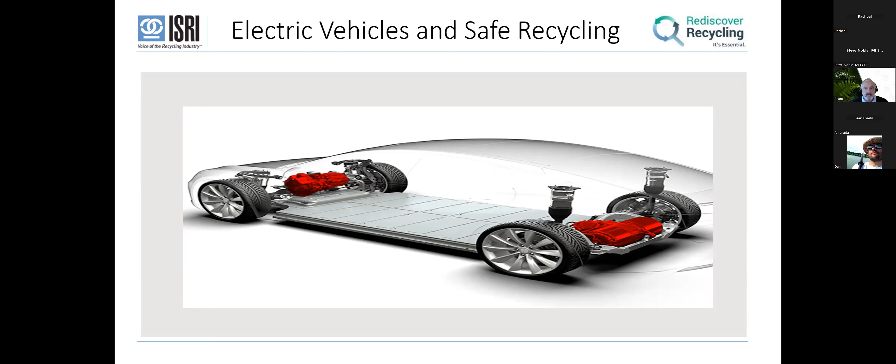And we recognize that so far there has been very little information about these vehicles. And as I said, we continue to learn. We are developing programs working with other parties and looking at many potential hazards associated with these vehicles. Some of those hazards are electrocution hazard, where we're seeing vehicles over 800 volts. We're looking at fire hazards. We're looking at explosion and thermal runaway hazards with these batteries. And we're also looking at the potential for off-gassing, hydrogen fluoride being one of the most potentially serious gases that some of these batteries can give off.

We're also looking at an arc flash potential. For those of you who may not know, arc flash is when something shorts out and you end up with an explosion that's hot enough to melt metal and contains a blast that can injure the person working around these pieces of equipment.

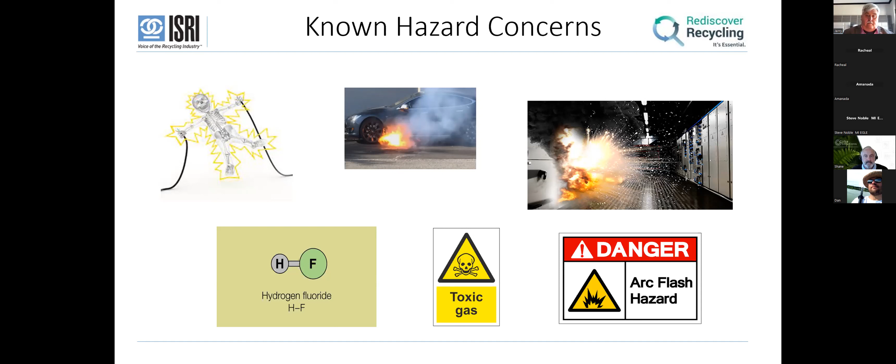One of our biggest threats are compromised vehicles. Having a vehicle coming into our facilities intact is one thing, but having vehicles that have been involved in a crash creates a real serious concern for us. A lot of the issue with compromised vehicles is thermal runaway. Basically it results in cellular failure, which causes the thermal runaway and then results in propagation and can cause some serious fires for us and damage other areas around our facilities. So we have to be very aware of that.

The other part is flooded vehicles. We're seeing a lot of that from the hurricanes in Florida. Those vehicles are compromised and have a potential for shorting out and also causing cell failure and thermal runaway.

One thing we've recognized, and there's a new term that we're hearing about, is concussive battery. Much like the cell failure from having a crash, it could be a minor crash where it looks like there isn't a whole lot of damage to the vehicle. However, much like a human concussion where the brain hits the skull, battery cells can hit each other and may not have apparent damage. But there are cases where because of concussive battery, fires erupt 30 days later or even a month and a half later. And that concerns us a lot. So we're really watching those types of things with these batteries.

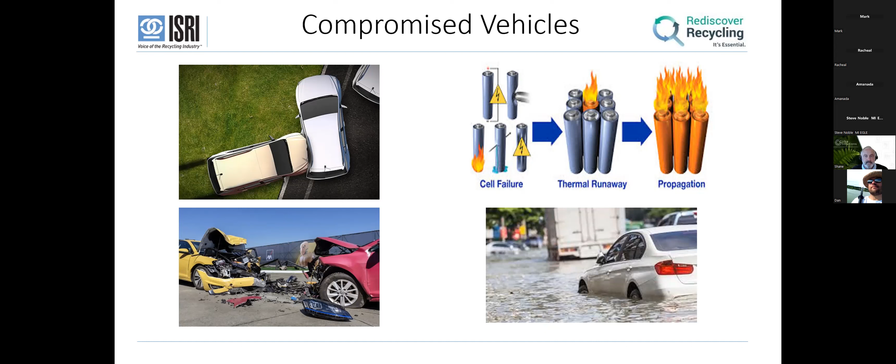So even undamaged vehicles have a potential to be a problem for us. And we need to make sure we're looking at vehicles that are coming to our facilities. They may seem like they can't operate. Anything like an appliance or a vehicle may not have enough charge to function. However, we recognize that some of these batteries still may contain 80% charge to them or more.

Part of the other issue we have is towing or dragging vehicles, because in many cases, these vehicles can actually create a charge that feeds back into the battery. And we need to be very well aware of that as we're going through this.

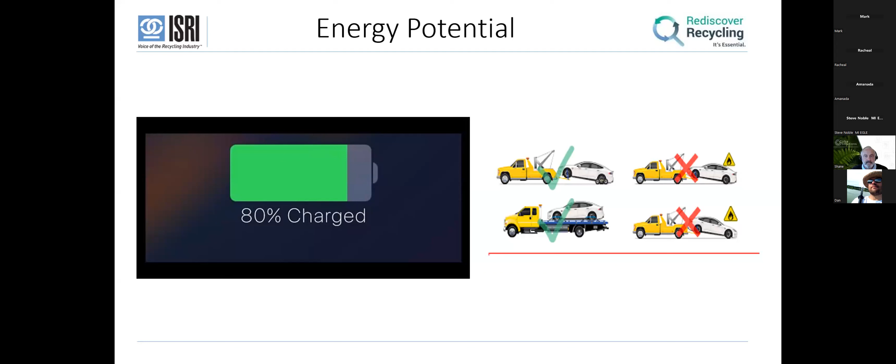So what are we doing? We're developing training programs for our industry. And right now we're at the point where we're looking at 3 levels of training: awareness or inspection level, technician, and advanced trainer. The awareness level, we're actually currently working on curriculum, and we're going to be filming a session that's about an hour long, which is going to be web-based training.

And we're hoping to start filming the end of February, the beginning of March, and we will release that to our members where they will actually be able to sit through and take that program, and they'll get a certificate of completion from that, and we'll know that they went to that.

To move to the technician level, we're putting curriculum together for that. That's actually going to be a hands-on program where you need to pass the awareness level in order to advance to the technician level. And we will be teaching technicians how to safely work around those vehicles. And I'll talk a little bit more about that in a couple of minutes.

The awareness level, I just wanted to point out, we will be teaching people to be able to differentiate between hybrid vehicles, full electric vehicles, and other vehicles, and also differentiate between compromised vehicles and not, and where to actually place those at facilities to keep the compromised vehicles away from everything else in case there is an issue with it, to prevent fires that take off and cause a huge problem for us.

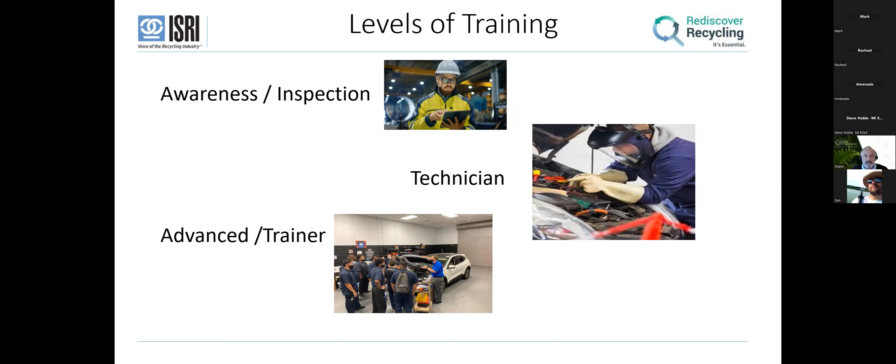Some of the things that we're going to be teaching about the fires and other things around these is what to look for. Certainly, with your different senses, sight, sound, smell, we'll look to see if there's any smoke coming from these vehicles, but we'll also look at things like the smell. We know that when these batteries are about to take off, they oftentimes give off a sweet odor like cherries. And that's one of the things that we will be spending time talking to our people about.

However, we'll be looking at ways to protect people from electrocution by wearing arc gloves and also arc shields and arc flash protective clothing, and also rescue hooks, and having those available on site in case somebody does get into trouble with the electric side of those vehicles.

We're also looking at testing equipment, being able to test if there's any potential within those vehicles, being able to test whether or not there's an issue with compromised cells within those vehicles, and that'll all be part of the training in addition to everything else.

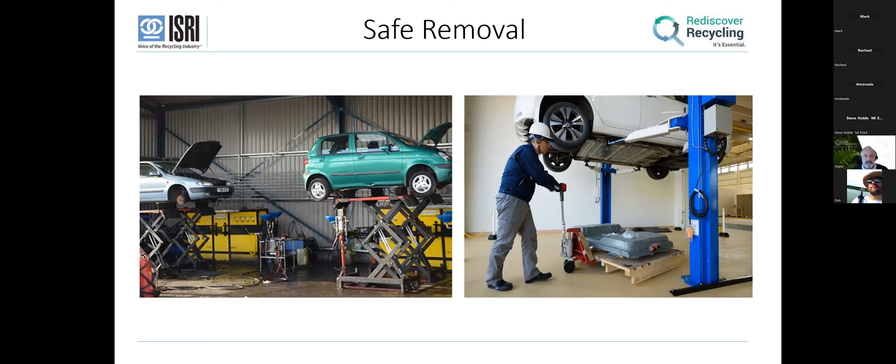Some of the other challenges that we're facing and we're looking at is battery storage on site. Making sure that the areas where those batteries are stored are not subject to temperature extremes, particularly higher temperatures. We want to keep those batteries somewhat cool so that they can't have an issue with getting overheated and catching fire.

And then speaking of fire mitigation itself. There's a lot of discussion about what to do if one of these batteries takes off. We know that in many cases, fire departments are told to bring 3,000 gallons of water to a scene with an electric vehicle. There has been some discussion whether or not it makes more sense to let the battery burn itself out because of the issues of not being able to get to the cells within the enclosed batteries, or if it makes sense to submerge the batteries in a liquid container of saline liquid to both de-energize the battery and put the fire out.

We know of cases where the fire department has come to extinguish a fire on an actively burning vehicle, only to leave and come back a few hours later because the vehicle caught fire again. So these are things that we're looking at and things that we will be training our members on as they work on these vehicles.

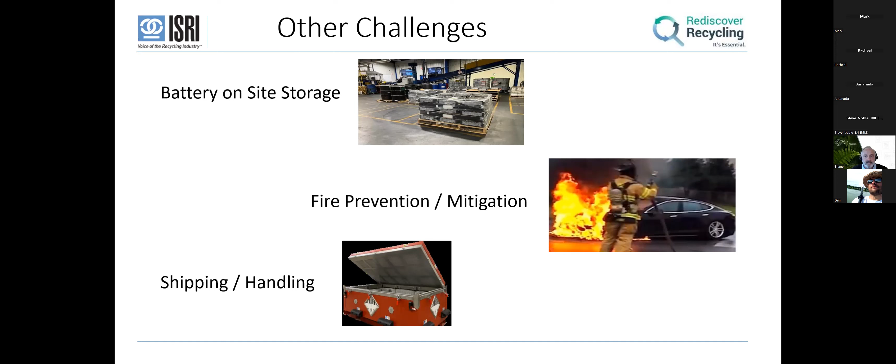There is a promise of evolving technology and safer systems. We know that the professionals and experts in the battery industry are closely looking at the current technology, and they're looking at other sciences to introduce silicon and other materials to make these batteries safer and a little easier to work with and handle. And we're excited about that technology. I was at a series of meetings not too long ago where they were talking about these technologies, and it's very exciting to us, not just for electric vehicle batteries, but for all batteries moving forward. So we look forward to that.

And I wanted to point out that we're not the only industry that's concerned with this. The towing and recovery industry, as well as fire services industries, are concerned with how to deal with these vehicles and how to deal with these batteries. And they're learning as we are about what to do and how to handle them safely.

Lastly, I wanted to talk about the hope for better vehicle design for easier and safer recycling. And not just vehicles, we look at that for all products out there. We, as I said, are in the recycling industry, and we would be excited to hear about ways that we can recycle these easier, remove batteries from products and vehicles easier. And we're hoping that the manufacturers of all these things look at this as we move forward with technology and look at easier ways to take them apart. And that's what I have for now.

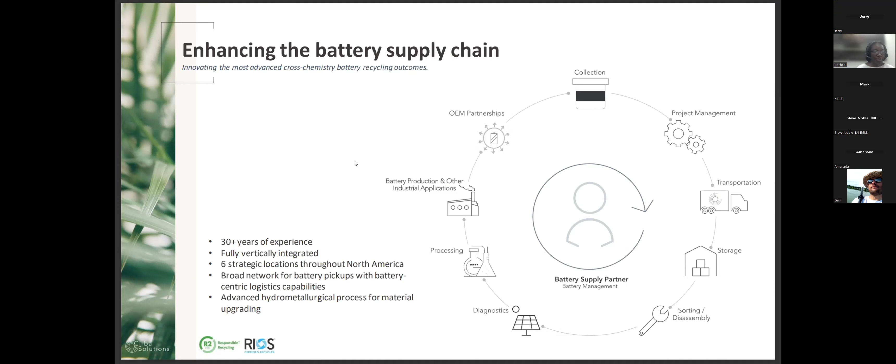So, the battery supply chain. Again, if you're going to build an electric vehicle, you've got to have batteries to support that. If you're going to build the batteries, you've got to have the materials. And really at the heart of it, that's what we're doing at Cirba. We're bringing in, and this model follows for certain battery chemistries, the historical battery supply chain model, which is take back the old batteries, recycle them, reuse those materials, and put them back into the new supply chain. So recycling is definitely going to have the ability to do that for the lithium ion space.

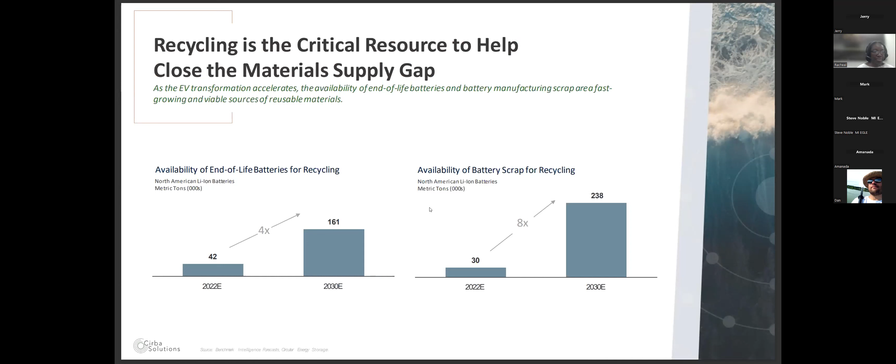Recycling can help close the gap in terms of getting those materials back into the battery supply chain. We can do that at Cirba. We think about it in 3 buckets. One is the small lithium ion that have been out there for a while and that a lot of people in the solid waste field are seeing coming back from the consumer. The next one is the large format that are literally and figuratively coming down the road. And then as all of these plants get going, they'll make production scrap. So all of these can contribute to closing that material supply gap.

So to push pause on the EV conversation and pivot back to how Cirba looks at the battery recycling ecosystem. What this slide really demonstrates is that there is a lot of interdependency and cross-function in terms of where the batteries go and how you get them back.

I always tell people that collecting used batteries for recycling sounds like it shouldn't be that hard. But in 30 years of doing it, it's very hard. The logistics are very challenging. They add a lot of cost. And so as the market grows, managing how you get the batteries, what kind of batteries you're getting, and how you manage their movement are going to be key considerations.

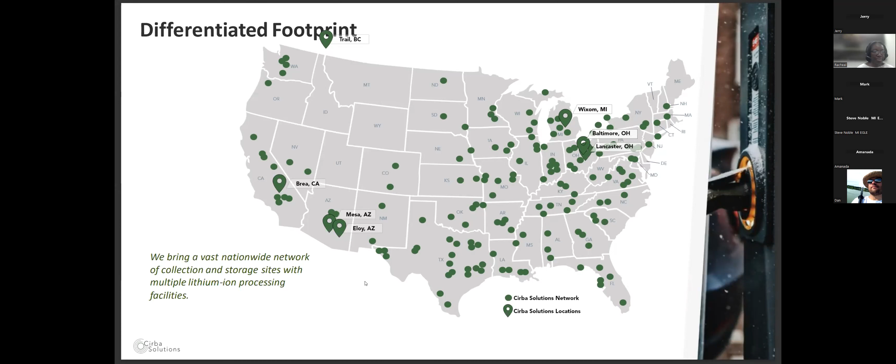The circles are facilities that we have a relationship with, such as an environmental service company that's got a TSDF or 10-day facility. They're equipped with the right drivers and the right trucks to pick up the material and get the batteries aggregated and sent to the proper facility for recycling.

So a little bit about Cirba Solutions in terms of our history. A lot of folks on the call may have done business with our preceding companies. Heritage Battery Recycling was started as part of the Heritage group of companies, a large privately held company in Indianapolis in a lot of very mature industries. They were looking to expand their sustainable investments footprint, and that was the reason for creating Heritage Battery Recycling.

Heritage Battery Recycling then acquired Retrieve Technologies, which had a long history of lithium ion recycling. The facility in Lancaster, Ohio was built out with DOE funds from the ARRA, the first stimulus bill back in 2009. That facility was recently awarded a $75 million expansion. So Retrieve was really good at the processing piece.

The last part of Cirba is Battery Solutions, and Battery Solutions was very good at the collection and customer facing portion. So between Heritage's understanding of the environmental market, Retrieve's processing, and Battery Solutions, you have a really complete service offering.

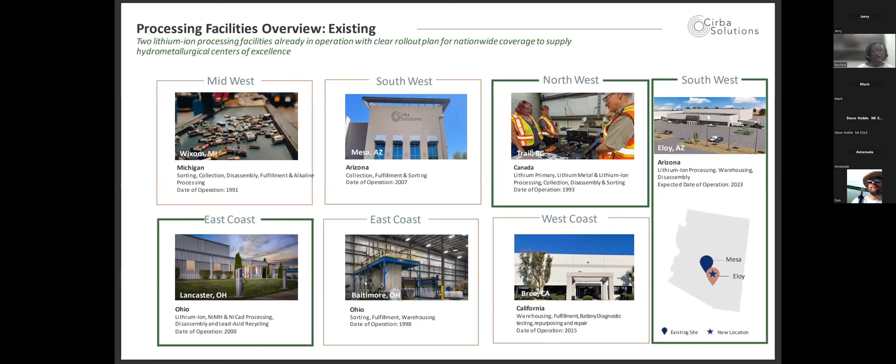So again, those facilities you saw are taking in everything from alkaline batteries to nickel cadmium. So we're processing across the spectrum, but we're also doing lithium ion and have been. In Trail, British Columbia, they've been doing lithium ion processing basically since there have been lithium ion batteries to recycle. Like I said, the Ohio facility came online in 2000. So many years under our belt, because there will be some time as the EV market ramps up.

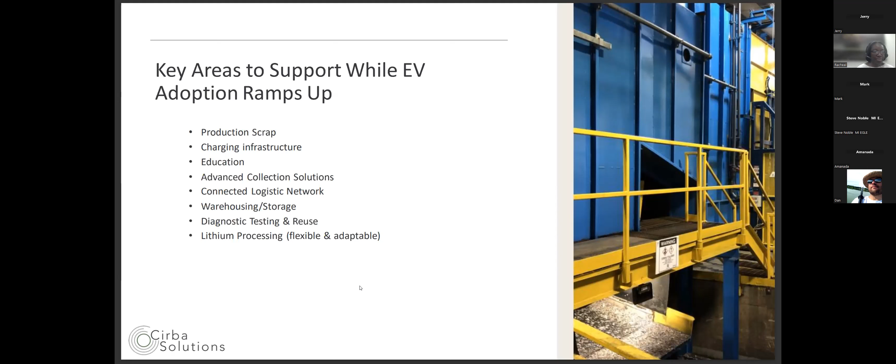So we think education is important. How do we dial in the most efficient collections? One of the things we'll talk about later is diagnostics and testing and the possible use of the battery as an energy storage device. All of these we think are going to be key areas that will allow us to grow our business while the market is ramping up.

So I'll talk a little bit about the actual processing of the lithium-ion batteries. This is really a conversation about historical versus future state. The historical model has been using a lot of process expertise and experience, a mechanical process to separate the batteries under solution, and you're getting the active materials coming off and going in one direction. You're getting the solid substrates being held up, so you get two recyclable materials, one that has the nickel and cobalt, one that has copper and aluminum. All of those can be recovered and put back into the supply chain.

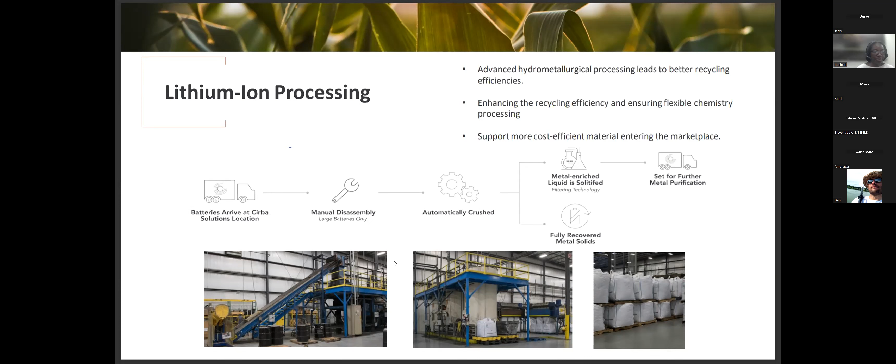The future state is with the DOE money, and we had actually announced this prior because we were going down the path anyway, which is adding hydrometallurgy to take that material and further refine it so you can pull out additional materials that will support the battery supply chain.

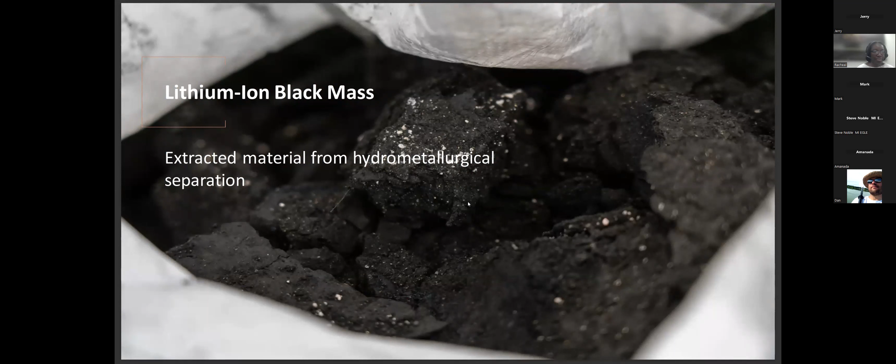And this is what it looks like. This is on the active material side. So this would be the part that would have the lithium, cobalt, manganese, carbon. All of those materials are infinitely recyclable back into the battery supply chain.

And again, I think Jerry did a really nice job of identifying some of the challenges that are out there. A few more that I'd mention are the distribution. So one of our facilities has worked with the OEMs on storing new batteries in support of warranty work. So you have a portal that the dealership can order the new battery, the battery's delivered, the old battery's picked up. Diagnostics can be applied to tell you about the state of health of that battery. And then based on that, you can make decisions about whether it has potential for second life or if it needs to go for recycling.

So that involves standardized training. We have developed our own internal training in terms of how you handle the batteries, what state they're in. Safety is very much at the heart of Cirba Solutions culture. It's job one. It's the most important thing that we do. So all of the training and the interacting is always viewed through that lens. But again, I think our experience has really created some unique education that we can then apply to the market.

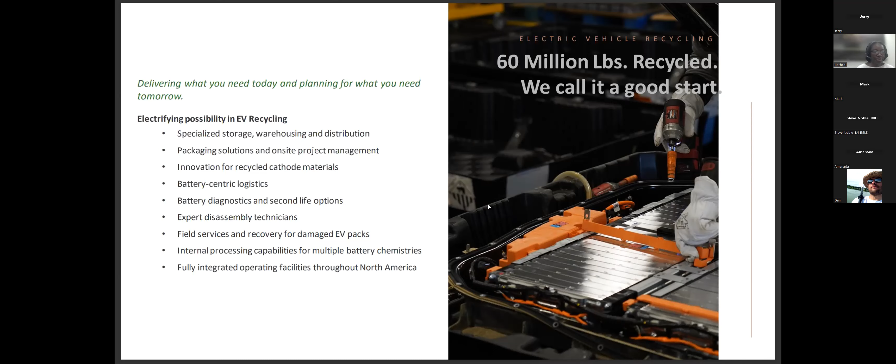Again, I won't go into a lot of detail on this. I do think this is really interesting. As these vehicle batteries age, years down the road, lithium gets intercalated on one side of the cathode or the anode, and so over time your battery capacity fades. And so when it gets to a certain point, the OEMs don't want you to use it in a motive application, say 79%, right? But that's still pretty good capacity as a battery. So it creates an interesting story about whether there will be applications for batteries that can't serve in their initial function, but could very well be used in additional applications.

So we're starting to look at that. We're starting to understand what type of diagnostic tools we would need to scale up. But I think this is a really interesting proposition. And again, the mantra probably for many on this call is reduce waste, reuse waste, then recycle. So this idea of reuse, having more value creation, is very interesting.

So just to recap, we believe the industry's at a tipping point. We feel like we have real solutions based on experience, and we're excited to take those experiences out and partner with everyone in the ecosystem to get the batteries in, get the batteries managed properly, the ones that need recycling, get those materials back into the battery supply chain so we can continue to expand and grow. So I'll stop there.

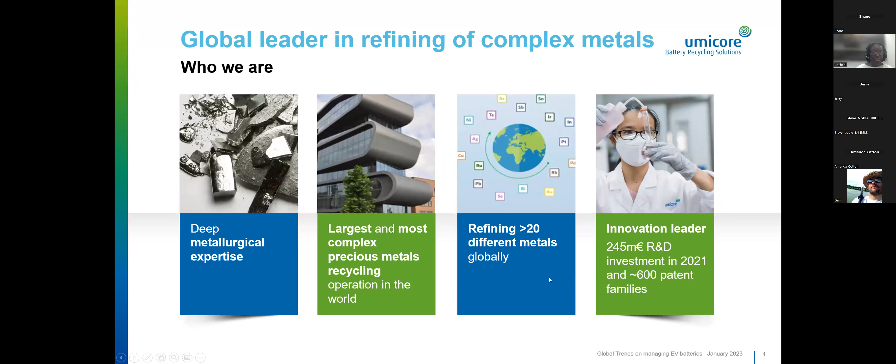But I do have an obligation to give you some background as to what Umicore is. So we're really a material company, and we have a lot of material expertise. We consider ourselves one of the largest precious metal recycling operations in the world, and we refine over 20 different metals. And the company has been around for a couple of 100 years, and we have been reinvesting a lot of our gains into R&D to develop further projects.

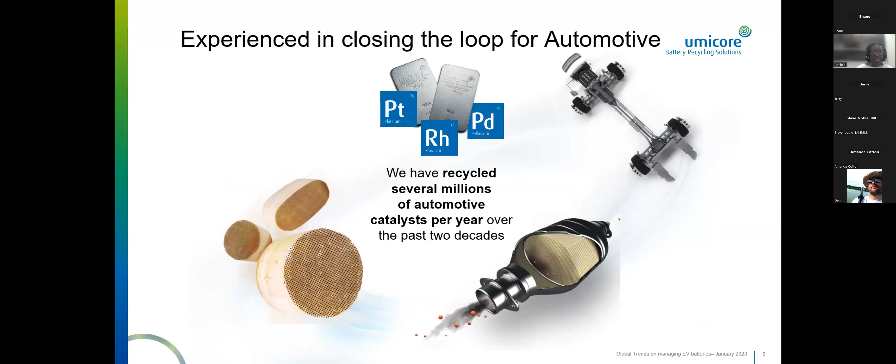We are known to recycle end-of-life catalytic converters. So if you have some catalytic converters, you know you can recycle those and recover the precious metals, being the platinum, rhodium, palladium, to give that a second life. And based on that technology, we have developed a battery recycling technology.

So we've been, how would I say, a pioneer in the recycling process. That's why we developed a recycling process in 2004 and have been operational since 2011. The technology has been updated last year.

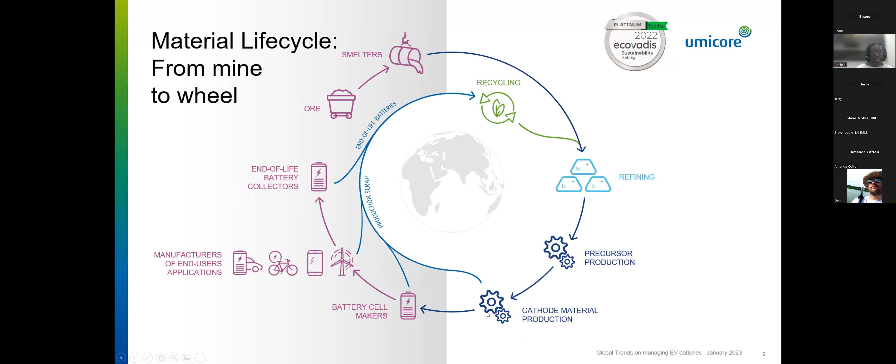A quick overview of the material life cycle. I'm using a bit the cycle that Shane had put forward, but this is really focused on the materials, where on the right side, Umicore plays a role, but then there are other players on the left side. The battery cell manufacturers, the users, the end-of-life battery collectors, and that then returns to recycling to recover the different elements that make new battery materials.

Closing the loop involves a lot of complex challenges, and you might have heard it from Shane's presentation. There's a whole range of things that need to happen, and not one single company will be able to resolve all the problems related to that. One big one with end-of-life electric vehicles is the collection and logistics. And then, like Shane mentioned, determining whether second life is worthwhile or not.

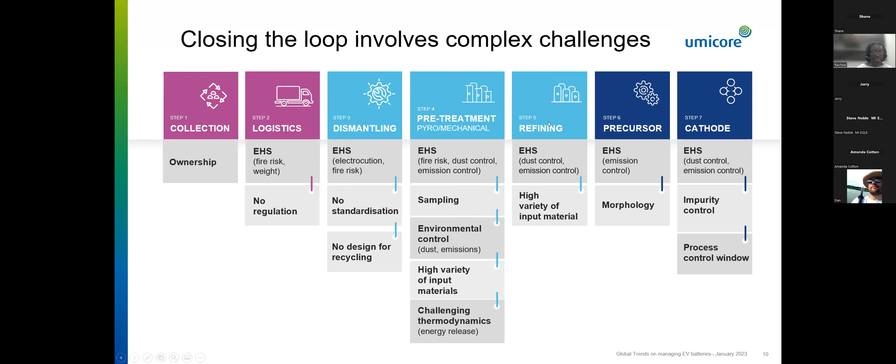If there's no second life, then the battery pack will be pre-treated, either mechanically by being shredded, or pyrometallurgically. All battery recycling processes have a hydrometallurgy that is used to refine the materials and then to make the precursor and the cathode materials.

In December last year, the Canadian Standards Association put out a study, which I encourage every one of you to take a close look at. But in summary, this was the schematic that they came up with, where on the top left side, you have PCAM, precursor cathode material, and CAM being cathode material. It's cathode active material, actually. That then brings the cell manufacturing and then the use of the lithium-ion battery in EV.

And what is of interest to us is what happens to the EV battery at end of that first life, at end of the life in the automotive application. Basically, they finally end up at the auto recycler or at the OEM or dealership. And they get to determine whether the lithium-ion battery pack has a reuse or repurpose function or not. If it's determined to have reuse value and or repurpose, then that lithium-ion battery will have a second life, be it in energy storage, be it in other battery applications.

Shane is very right to point out that the functionality of a battery is a lot more valuable than the materials that are contained. But then even at the end of the second life, that lithium-ion battery can be recycled to recover the different elements, such as the nickel, cobalt, lithium, or it could be used for other applications.

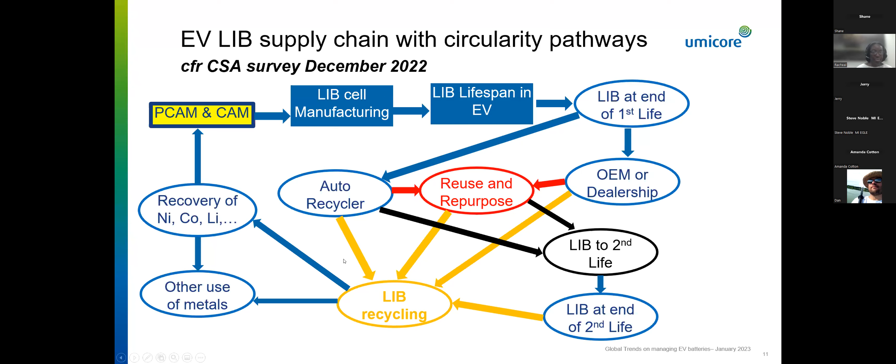Some of the key gaps that were identified in that study relate to all these points. I'm not going to read them to you in detail because I think these presentations will be made available, but it just shows you that this is still a nascent industry. There's still a lot of unknowns, and the whole relationship with the second life and what to do with the end of life of the lithium-ion battery. There's still a lot of questions around it.

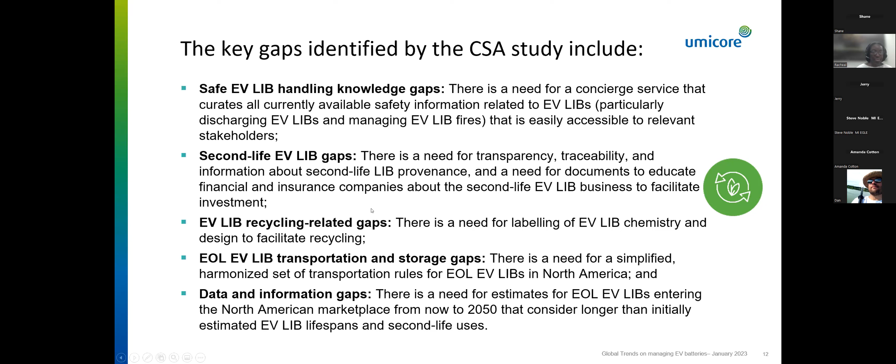So I'm afraid we will not be able to answer all your questions, but we'll do our best to try and answer most of them. What are the challenges affecting reuse or recycling of EV batteries?

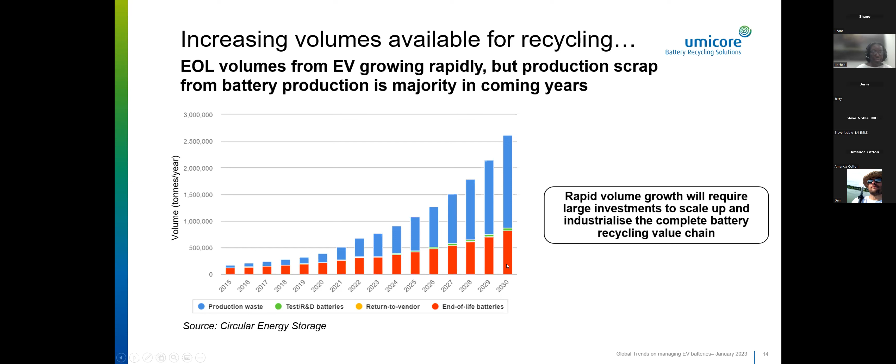Numbers vary. Not everybody can agree on the exact numbers, but everybody agrees that the growth of EVs is going to be exponential, and then the growth of the material that is becoming available globally is going to be increasing exponentially. Where you see here the blue histogram is production waste from the battery manufacturers, and the red one is the end-of-life batteries that become available.

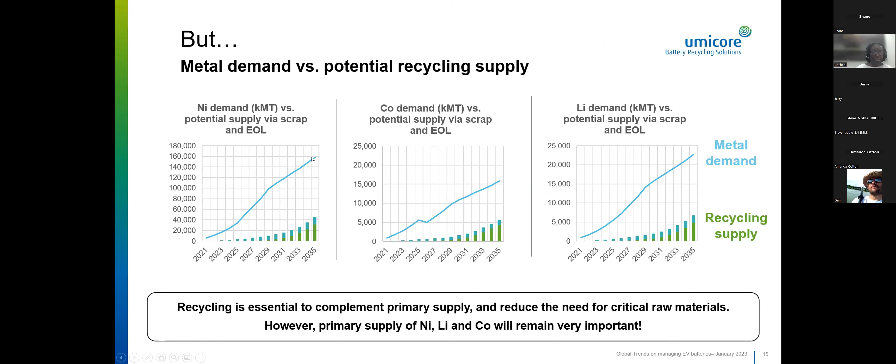Another item that Shane presented differently is the demand for the different elements being nickel, cobalt, lithium, just to illustrate that there's going to be big demand, but recycling can help. Recycling will not be the solution to everything, but recycling can help as we get more of these metals out of the ground.

Globally, there will be different regulatory frameworks. Being based in Europe, Umicore knows best the European legislation. And this is an overview of what is in the pipeline, what is the situation today, but also what the targets are. There are even targets for recycled content.

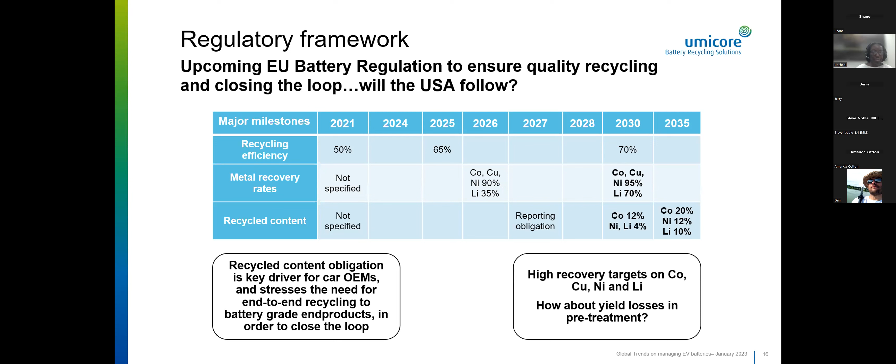And that then is addressed towards the battery manufacturers, that by 2035, the battery manufacturers need to have 20% of their cobalt that comes from recycled material. Similarly, for nickel, 12%, for lithium, 10%. My question would be, is the US going to follow suit? Now, in any presentations, I just report what European regulations are, but I don't encourage anybody to follow suit completely, but we maybe could learn and just keep the best of that system.

The question being, if you can reuse this as a battery, you don't have to recycle this material as such. The Umicore process today can take the module size as whole, so that doesn't need to be further dismantled. And the facilities of the future will be able to take the whole pack as they are today in our recycling process. But the question really is, is it worthwhile to do that? Aren't there parts that can be reused?

So when you're looking at the cost of making what we call an NMC 811 battery, NMC stands for nickel, manganese, cobalt. And there is a wide variety of different chemistries. So when one speaks about lithium-ion batteries, you have to differentiate between the different materials that are in it. And the chemistry that's being spoken the most about is lithium iron phosphate, or LFP, which doesn't contain any valuable material. So at the end of life, that material will also have to be recycled. But as the lithium and the iron phosphate has less value, who will be paying the bill? Good question.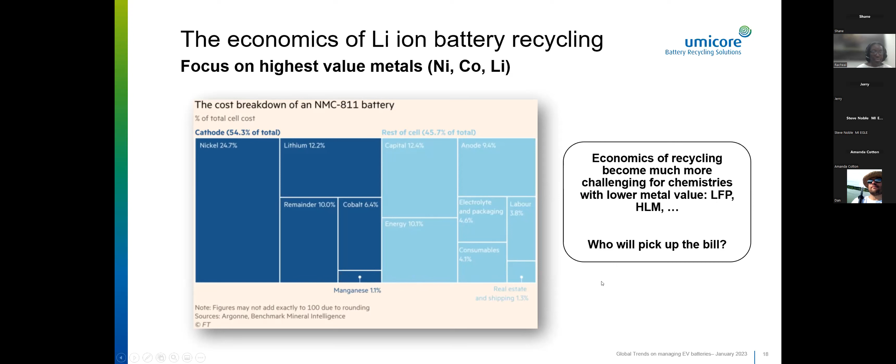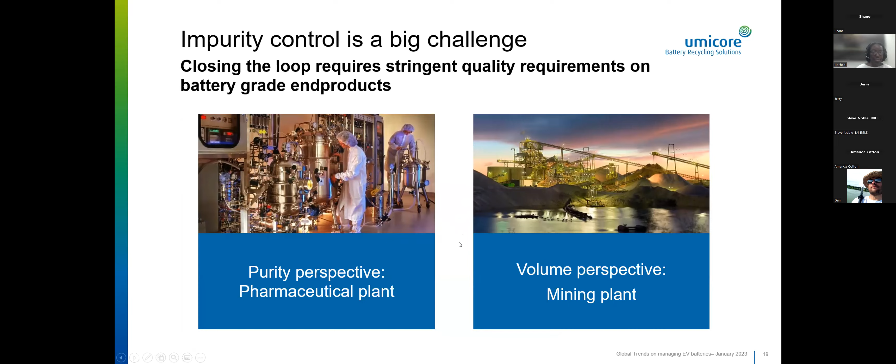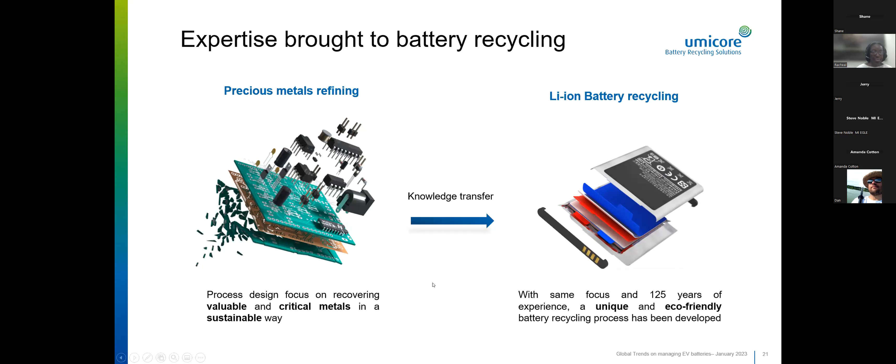As mentioned, Umicore has been active in recycling, and we have a facility in Hoboken, Belgium that has been recycling end-of-life electronics since the 70s, end-of-life catalytic converters since catalytic converters were being used. So that's why we developed the lithium-ion battery recycling. With the major industrial facility being in Hoboken, Belgium, we can process about 7,000 metric tons of material there. But we do need to dismantle the larger packs to be able to feed our process.

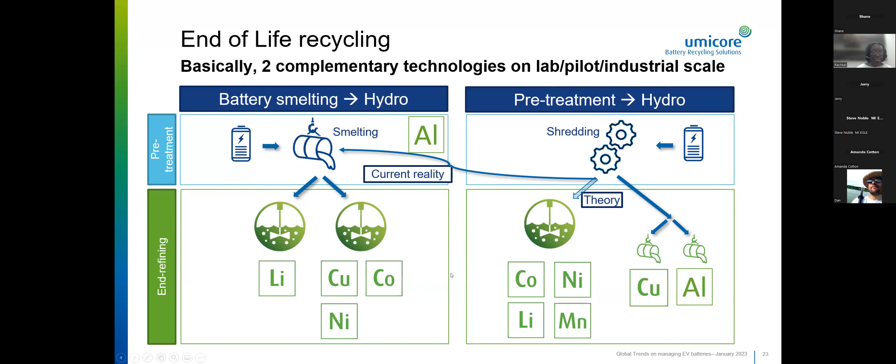Now, you always hear about two different technologies, pyro versus hydro. But the correct interpretation is pyro versus shredding, because all battery recycling processes have a hydro, which is the end refining, which is in green here. And there is an alternative way to either smelt the battery or shred the battery. And basically for Umicore, we are doing the smelting operation, but we're taking a look at the second side of it. And that's why we have two flows. One being the pyro battery smelting, but then the other one really starting from black mass, as everyone was talking about.

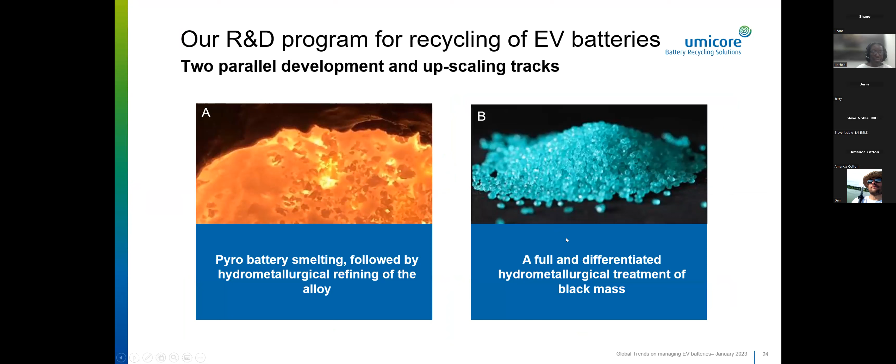What we are planning to do: we have in place already the facility in Hoboken, Belgium, which has 7,000 metric tons a year capacity. But then this year we're going to decide on building a larger facility, 150,000 metric tons a year, where in Europe that will be determined this year. The next step will be a facility in North America, where that probably will be determined in '24, but should be operational by '27.

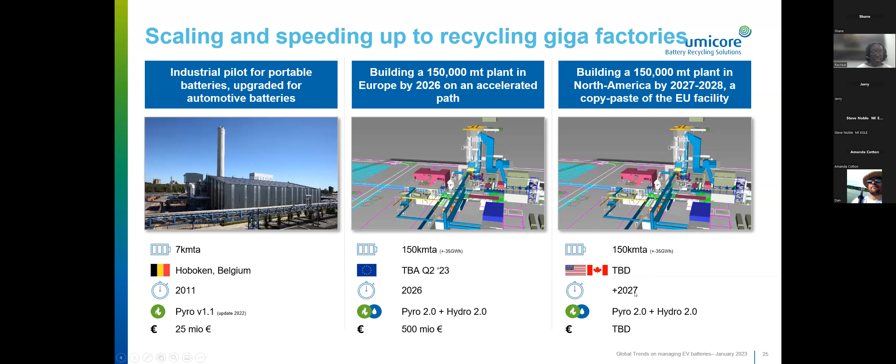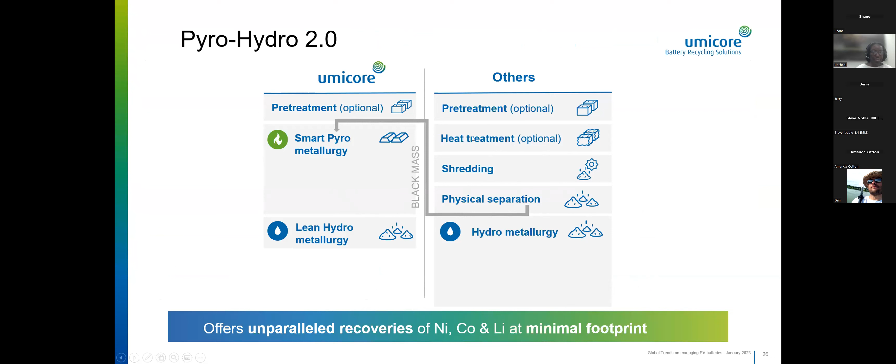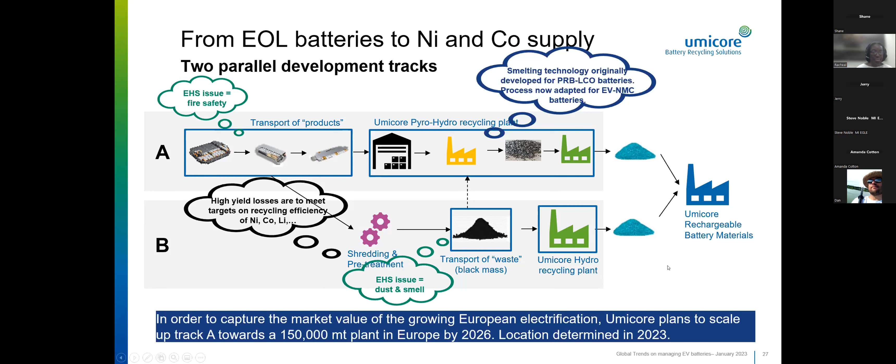But our process has been adapted for electric vehicle battery packs and mainly the NMC battery chemistries. So basically, yes, there's a lot of waste or end-of-life batteries that are going to be generated in the coming years. But we will have facilities on a regional basis to process those materials. So for us, battery recycling is an opportunity, but it's also essential to keep the supply chain going for the battery materials.

So we are upscaling both the pyro and hydro recycling routes. And we are also using what they call life cycle assessment to determine which of the processes is the best for society. And that was my presentation.